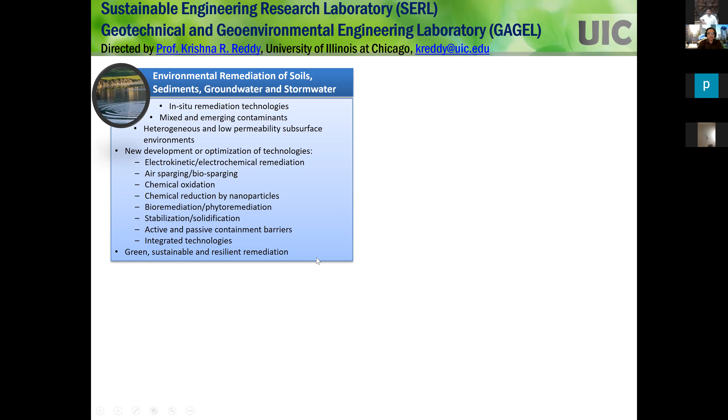I work on different types of technologies, integrating and optimizing them, starting with physical, chemical, and biological technologies. The reason I work on different technologies is you have to match the subsurface conditions with the technology - there is no one technology that can take care of all expected situations in the real world. Recently I've been working on green, sustainable, and resilient remediation. That's one of my major research areas.

The second research area is related to this short course: I work on waste management and landfill engineering. Waste management deals with beneficial use of waste materials, even biological processes. When you talk about landfills, as geotechs we contribute quite a bit, looking at mechanical stability, contaminant transport, liner systems, and cover systems. These days we use a lot of biological concepts to make things sustainable, so we work on biocovers and bioreactor landfills.

In this course, I'm giving brief lectures on broader topics. But if you are interested in knowing more about a lot of my research, you can look into the papers that I have written.

The other area of research I work on is called life cycle assessment and sustainable resilient engineering. Here we try to quantify sustainability and then assess different sustainable materials and designs. This is a very broad area applicable not only to geotechnical and geoenvironmental engineering, but any specialty in civil engineering, even chemical and mechanical engineering. It's becoming very important these days to look at sustainability and resiliency - not just talking about it, but actually doing something and evaluating how well you are doing towards this sustainability and resiliency.

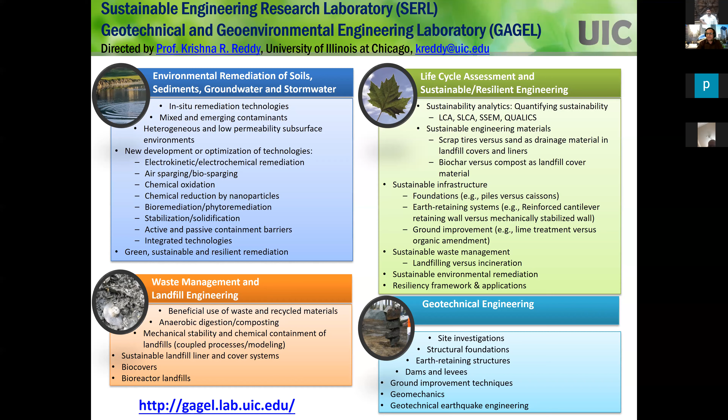If you want specific research projects and publications, go to this website and you can find all the information you need. That's what I do for my research. It's pretty broad, but it's more on geoenvironmental engineering, sustainability, and resiliency.

When I do research, I follow this research philosophy. First, I identify the real world problem - what is that problem that needs to be resolved? Then we come up with a hypothesis of the solution that could be potentially feasible.

We test that hypothesis through bench scale testing - basically small scale experiments in our lab. If results are promising, then we scale up and do large scale testing right in the lab.

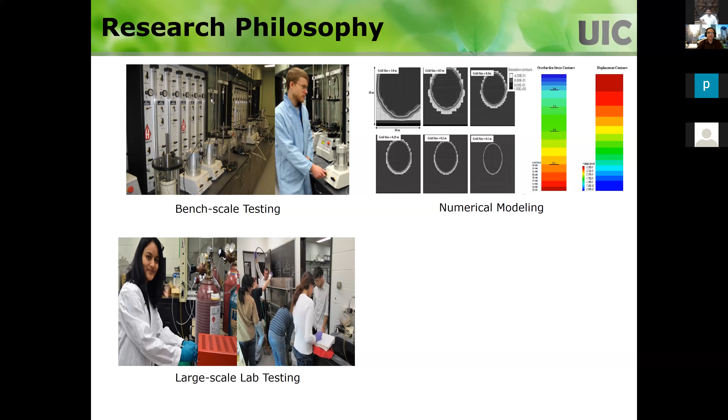If it works out good in large scale testing, we do mathematical modeling. You understand all the different fundamental processes from the bench scale and large scale lab testing, and we incorporate those processes into mathematical modeling to model real world situations - if you have to do that project on a large scale, how do you do that?

So we model that mathematically, then we actually design a typical field system, go to the field, and try to implement that and see if it works as we modeled. It's always important to start with fundamentals, then go systematically and evaluate that solution in a field scale scenario.

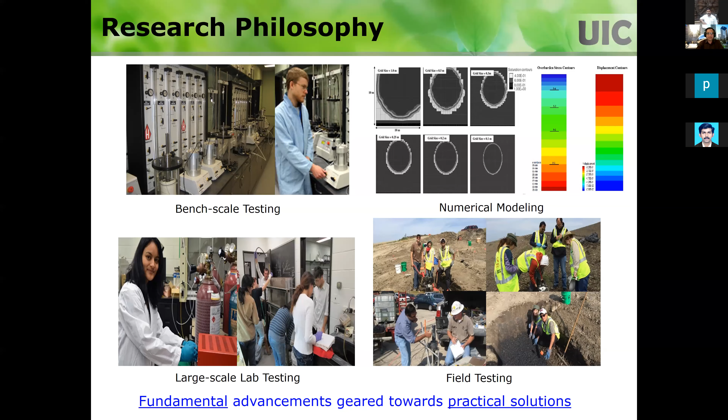Our research goal is, for every project we work on, to advance the fundamentals, but at the end, come up with a practical solution. We don't just want to look at fundamentals and write papers - of course we publish papers, but we want practicing engineers to take our solutions and implement them to solve real problems. That makes us very happy, because we're able to contribute to solving society's problems and making a difference. That's the research approach we follow on the projects we work on.

I do a lot of lab scale testing. This is our lab, showing the facilities we have. We have all kinds of soil and material testing, geochemical characterization testing, and depending on the project, we develop bench scale testing. These are all in our lab, and the students actually use all these things.

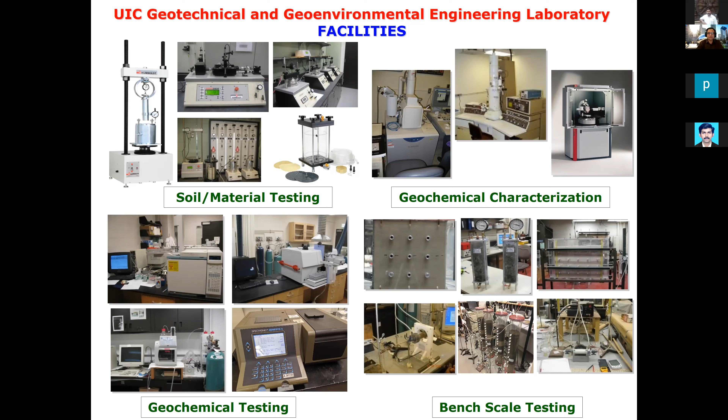Over 25 years of my career, I have had the pleasure of working with students from all over the world. In the US, we have people coming from different countries, so when I go to the lab, I have international students. It's very nice to interact with these people and learn not only through research, but also learn the culture and have a good time.

Not only working with these people, but every few years we get a different group of students. So you keep working with the students, different students every few years.

Coming back to the presentation, my presentation is on end use of landfills. This is how I'm going to organize it. First, I'm going to talk about waste dumps - how do we deal with them, what are the problems, and then how do we solve that problem. So remediation - how do we remediate? And then once we remediate, how do we use those sites for beneficial reuse? So end use - how can we use these sites at the end?

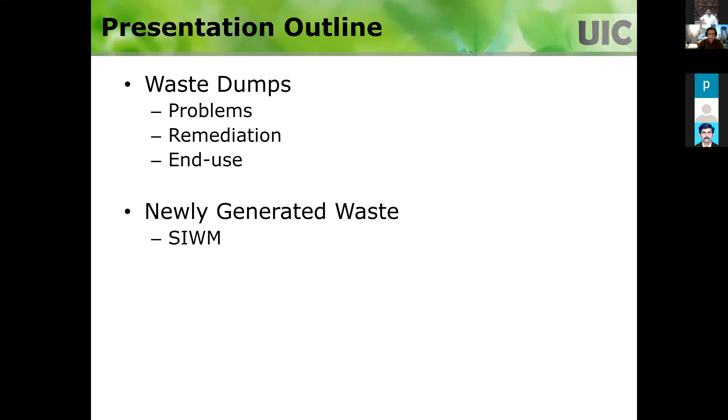I'm going to talk about that one in the beginning, and then I'm going to talk about the newly generated waste. These waste dumps are for the waste that was generated in the past, and that's how it was handled in the past. But now, when you have newly generated waste, that needs to be handled properly, not dumped in the waste dumps. So I'm going to introduce the concept of sustainable integrated waste management.

And then I'm going to talk about engineered landfills very briefly, how these days landfills are engineered. And once you have an engineered landfill, and once it gets closed, what can you use those sites for? That's what I'm going to cover. At the end, I'm going to have closing comments, and after that I would love to answer any questions that you have.

I just want to put this caveat - since I'm in the US, I'm going to give a US perspective on all these things. Unfortunately, I don't know much - I know some background on what's going on in India, but I cannot be an authority to say what is correct. So I'm going to basically give you a US perspective, which is good because you need to know what is done in US, and then you can see what are the lessons to be learned, and how you can do things in India, right? So that's my agenda for my presentation.

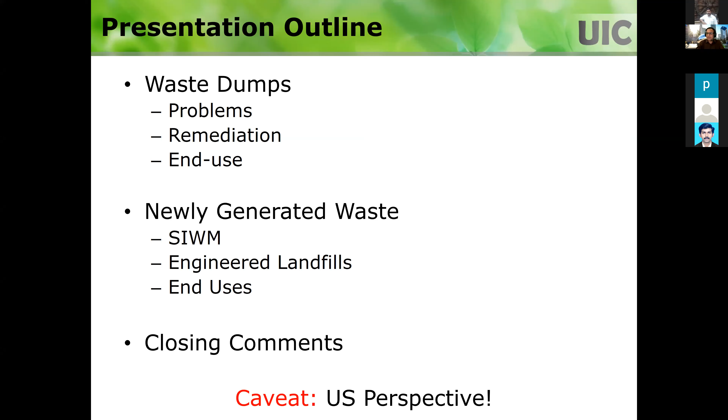So let's talk about open waste dumps. If you haven't seen a waste dump - if you are in a small city, you might have seen outskirts where people are dumping it, or the city designated a certain area for dumping, but you probably don't see huge piles like you see in big cities. If you are working in this area, one advice I have is for you to go to one of these sites and visit them. You can call up people, get some contacts, and say hey, we want to come and see it, we are students, can you show us? It's eye-opening. You can read books, you can listen to presentations, but you cannot get the feeling that you get when you visit these sites.

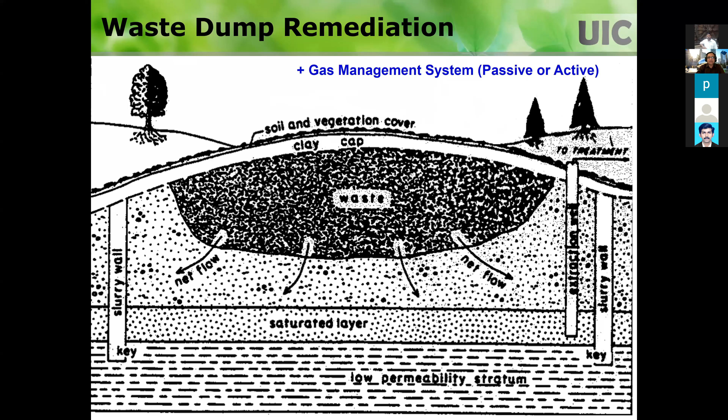So, gas management system - I gave you a lecture on this one the other day. You can have extraction wells or trenches, or if the gas flux is not that much, you can actually have a clay cap amended with some organic material, like biochar. We call this biochar-amended soil cover, and it mitigates the gases passively within the cover system, eliminating the issue.

So that's how these are cleaned up. Once you clean up and put vegetation on top, it can convert into a park. Most of the time, the end use as a park is the cheapest option. Of course you need to grade the elevation and everything. This is one of the landfills close to my area, and people go there since it's high up.

And then from there you can get a good view. But there are other end uses possible, which I'm going to talk about later. Even those end uses are possible on closed dumps as well as engineered landfills after closure - I'll explain those later. But the simplest end use is as a park, with a soil cover so there's no exposure issue to people. They can go there and enjoy it, and since you have a mountain, the top view would be a prime spot to look at the surroundings.

On the other extreme is mining - basically digging it out, screening, and separating these things. But mining is done only when the organics are mostly degraded. If you have organics in there, generally it's not done. The other thing is the residue after organics degrade - it should be clean, not contaminated. If it has a lot of heavy metals or other semi-volatile organic compounds, then mining becomes very expensive because you need to address the contamination.

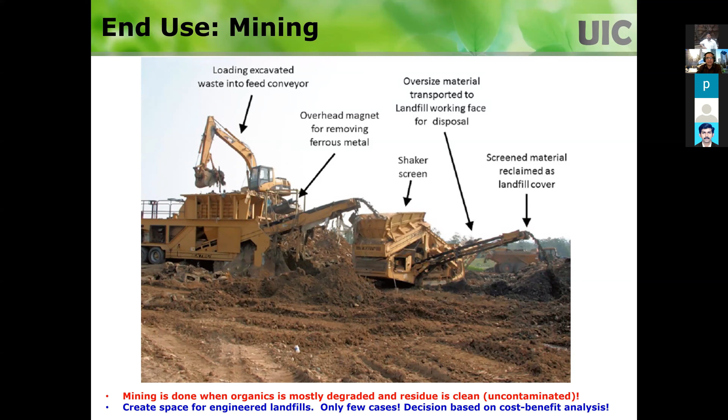So just wanted to mention that - in the US, that's the status. In other countries like Europe it could be different, but in the US most mining is done in areas where they wanted to create space for an engineered landfill - digging out all the degraded waste from the old landfill and using the same space to build an engineered landfill. That's the waste dump story, from a US point of view. You learn the lessons from that, and then see what can be done in India.

Now the question is about newly generated waste - we are creating waste every year, and the amount generated is increasing because the population is increasing and so forth. So if you have existing dumps and you're not solving those problems, and you keep piling newly generated waste on top, when are you going to solve the problem? The waste dumps problem is going to keep increasing - tremendous amounts of waste are being generated, and this waste is still going to the dumps. So if you're trying to clean up the dumps but keep adding more, the problem isn't going to go away. Think about it - it's not rocket science, just think about it in very practical terms.

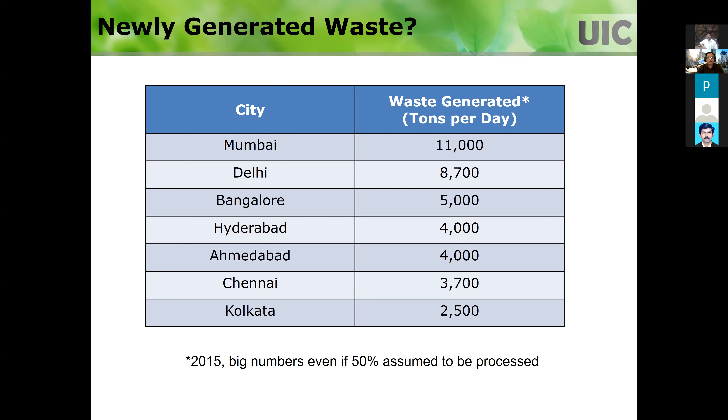Okay, if I'm generating so much waste per tons per day, so it's like Delhi, 8,700, Mumbai let's say 10,000 per day, right? Even if you assume 50% processed out of this, so 5,000 tons per day. You can add up every day that much. So per month, how much? Per year, how much? So you still need to accommodate that waste somewhere. So if you don't have an engineered landfill, obviously you are taking it to the dumps, and the dump situation is going to become worse and worse.

So young guys like you guys need to think rationally. Also all the stakeholders that work on these waste management issues, they should really come together and think about what is the long-term solution to this waste problem. So we have waste dumps, and we are creating new waste every day, right? So we need a comprehensive solution to this problem. This is a very challenging and very important issue for researchers. If you're a student, master's or PhD student, if you can do something in this area, you are really helping people, helping the planet. So if you are passionate about environmental issues, this is the one that can really make you happy. So question is, what can be done, right?

So what is the big picture? What can we be doing with the newly generated waste? What is the rational way of doing it? So I want to show you this picture. This is called integrated waste management. Remember, you've probably seen the waste management hierarchy, but the waste management hierarchy does not work in the real world. So this is called integrated waste management strategy, where you're going to collect and sort it, and then do the material recycling, and then some biological fraction you want to treat by composting or anaerobic digestion, and then whatever is possible, you want to treat thermally with energy recovery or without energy recovery, and also things that you cannot do anything with any of these other options, you can landfill it. Not landfill here meaning you're talking about engineered landfill, not the waste dump. And you can actually make that landfill an energy resource, so landfill gas use, you can do it.

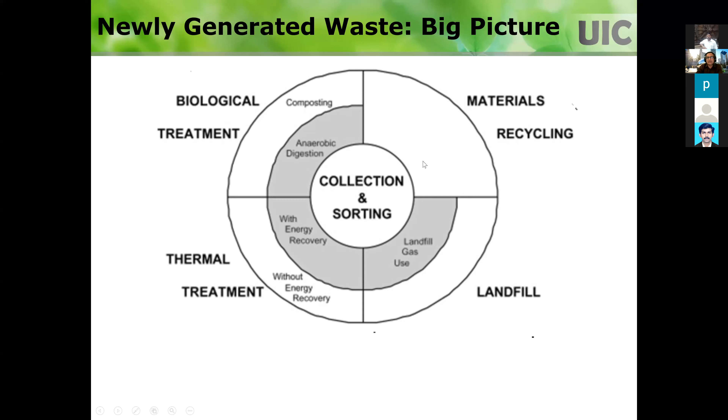So what I'm trying to say is, a lot of times people argue that okay, we're going to use thermal treatment and make the waste disappear. That's not going to happen, because there's a certain amount of waste that is not amenable to thermal treatment. Or you want to do biological treatment, not all waste components are amenable to these biological treatments, right? Not everything could be recycled. So the idea of integrated waste management is that we need to use these combined options at the same time. Don't think like, okay, I want to emphasize this more and emphasize this less, but look at your situation and come up with a combination of these options. So you want to have material recycling, biological treatment, thermal treatment if possible, and also landfill. You need to really think about this framework of using all the options that you have to benefit the situation that you have at hand, right? So this is called integrated waste management.

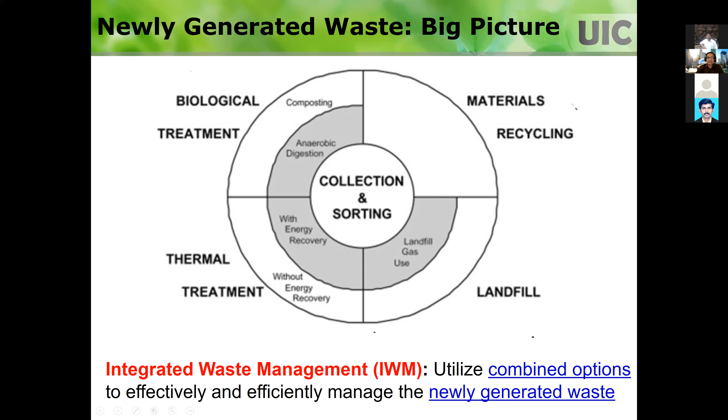Now the question is, okay, I'm in a city, obviously I cannot do 100% recycling. How much should I do biological treatment, how much thermal treatment, how much should I landfill? That really depends upon sustainability factors. So you really look at that integrated waste management from a sustainability lens. This is what I mean by that. So this is the integrated waste management strategy that you have in the middle, right? That's what I showed you before. Then how much of each option you have to use in a given situation really depends upon economics - what is economically feasible? And then environmentally, what is the best way to do it? Obviously you're trying to create a better environment, but if I have thermal treatment and other secondary environmental negatives, then that's not good. So you need to look at the broader environmental impacts, broader economic impacts, and then you also need to look at the societal issues, right? Community issues. So obviously, you need to give them food first before you think about spending a lot of money on this integrated waste management.

You need to really think about the people in that community, what their social requirements and survival requirements are. You take care of the social needs first, and then in that context decide what can be done. This is the best framework you can apply.

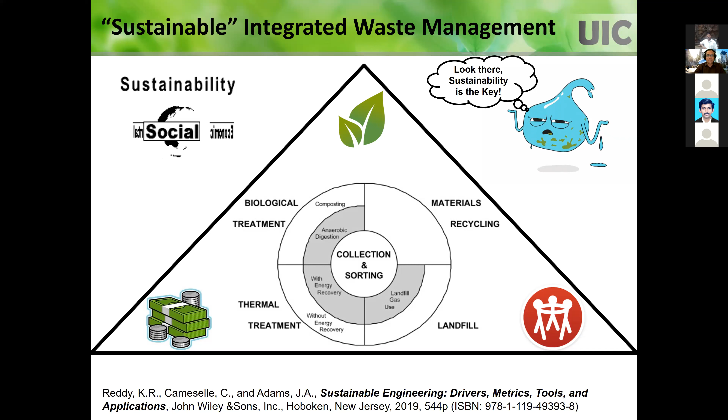This is the framework people are not grasping. People want to do just one thing. The reason it's not grasping is you need a multidisciplinary background to address this waste management issue in a holistic way. I could spend a lot of time on this, but this course is focused on landfills.

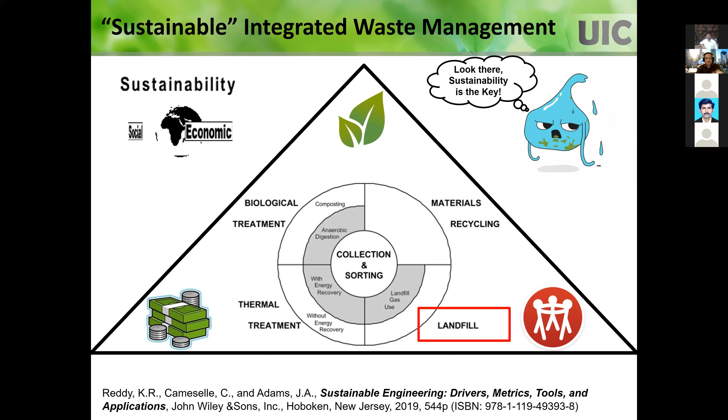Waste containment systems, landfills - this is not rocket science anymore. In the US we have regulations, and people follow the same kind of design everywhere in the world. You have a bottom liner, a side liner, a leachate collection system on top, then you pile up the waste, and then you have a final cover.

We have well-established materials and design methods for liner systems, leachate collection systems, and final cover systems. People are doing it - in the US we've been doing it for over 30 years. We design landfills per these established procedures, they've been monitored, and they are working well. It's a proven concept with proven design analysis methods.

So not only the bottom liner, leachate collection system, and final cover system - all these landfills will have leachate collection and treatment. That's important because the main problem with landfills is the leachate that needs to be addressed, and also landfill gas that comes up. So what do you do with that? You collect it and treat it, or do something with it.

As I mentioned in my last lecture, there are many options for that - you can create energy out of it, which is good. So landfill is not a waste thing; you're creating an energy source that you can really capture.

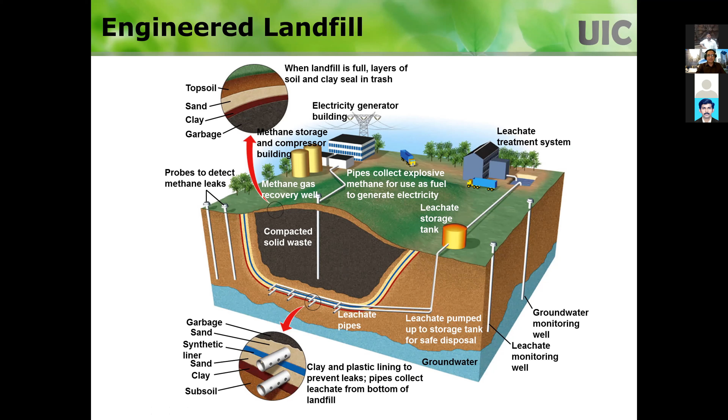We do these things routinely in the US.

So as I mentioned, there are a lot of resources that you can use to design these landfill components. We wrote this book, and my co-author has over 40 years of practical experience. I also worked for 3 years in industry. So whatever is in this book, it's not hypothetical, it's all what is actually being done in practice.

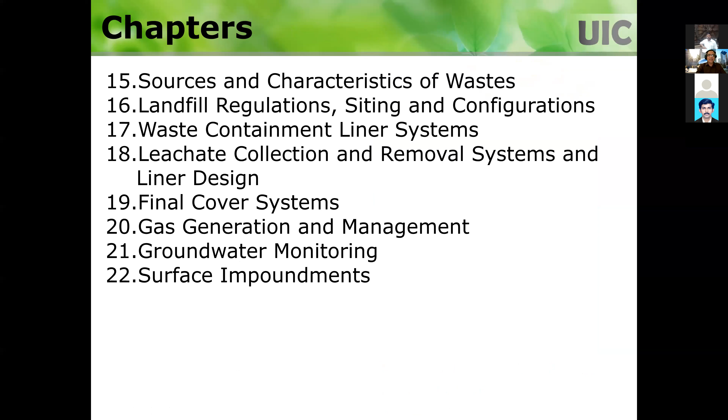I know this book is expensive, we talked about this before. Make sure your library or somebody who can afford it can get it, and look at these chapters carefully. I like the way these chapters are written, because it's a logical sequence of topics.

When I took landfill class as a graduate student, my professor came in and started talking about liners on the first day. I had no clue what we were talking about, because first you need to know the sources and characteristics of the waste. Are you dealing with MSW landfill or hazardous waste landfill? What are the regulations? How do you locate the site? What are the liner systems? You need to build gradually. Even within liner systems, you need to think about where to start - what is the logical way to work on these things?

So that's the idea of writing this book - to give a new reader, new engineer, or student these sequential topics, and at the end you end up with an engineered landfill that works. As I said, all the landfills in the US are engineered - we don't have any dumps. Dumps are not allowed.

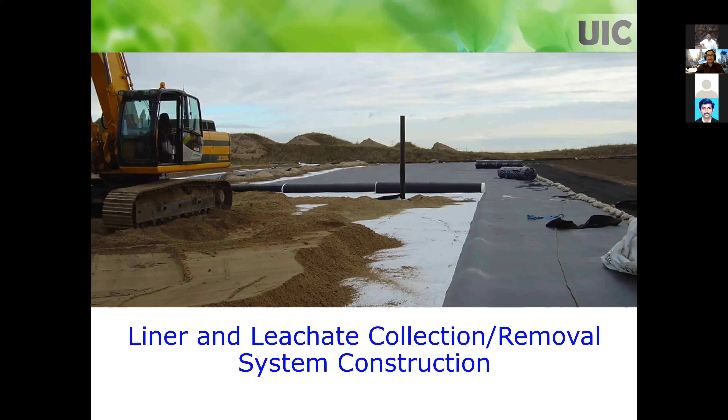I've been to many landfills. As I mentioned, you really need to go to a landfill. When I teach a landfill design class at my university, I make sure we take students to the landfill, and have the landfill operator give a tour of the whole landfill, so they can put what they learned in class into context when they see everything.

You place everyday waste and compact it with these compactors, and every day you cannot walk away without putting a daily cover. The next day, if it's a removable daily cover, you can remove it and put more waste, compact it, and that keeps going. At the end, you put the final cover construction, and then what is the end use?

Remember, the landfill requirement says that after you close it, put the cover and vegetation, you need to monitor for 30 years. What are you monitoring? The leachate, gas, and groundwater - that has to be done for 30 years. During landfill operations, money is taken out from the landfill owner and put in the bank.

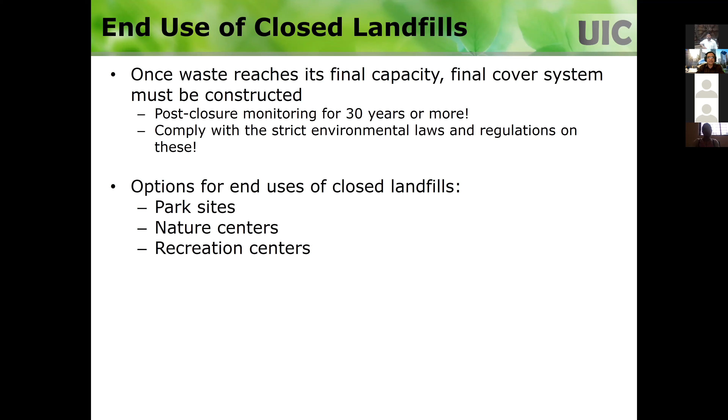Coming to the end use of closed landfills: once you reach the final capacity and put the final cover, you monitor for 30 years, as required by environmental laws and regulations. Then that site can be used for different purposes - park sites, nature centers, recreational centers, golf courses, commercial buildings. You can use it for a lot of these different end uses.

Unfortunately, people don't think about this end use at the beginning of the landfill project. They think about it only after the landfill has been in operation for many years, or when it is closed. By that time you have less flexibility - you've already decided what the geometry and final cover are going to be. If you knew in the beginning, you could have changed certain things and made it much easier.

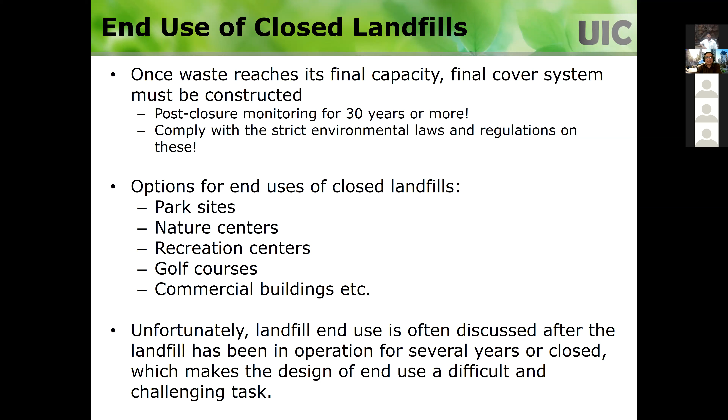So the end use is important. You don't want to walk away from the site and leave that large area of land useless. You want to use that area for some beneficial purpose, and the end use consideration improves the aesthetics of that location.

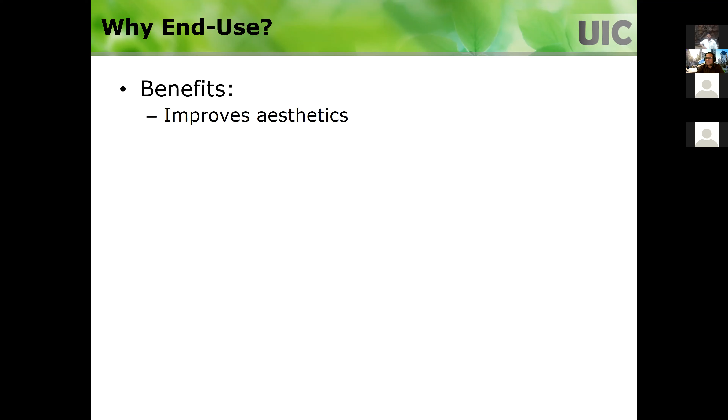Here in the US, you go to a closed landfill and you don't even think it is a landfill - there's no smell. Somebody has to tell you, or you'll see monitoring wells around, then you'll realize it may be a landfill. Otherwise, they are very nice locations - nice sites that look pretty good.

Especially if a site is in an urban location where land is scarce, using it even as a park in the middle of all that built-up area is really nice. That's what I'm saying.

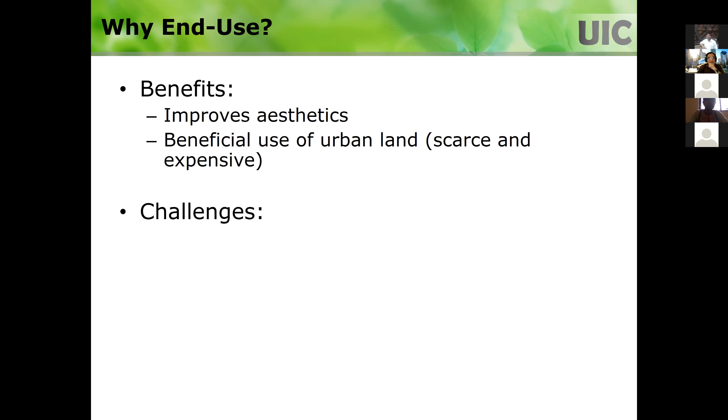Those are the benefits, but there are a lot of challenges. You're trying to build on top of the waste - think about it, building on top of soft clay is a problem. The problem with building on top of a landfill is you're going to have substantial settlement, also non-uniform settlement, which is a big problem.

The waste is degrading slowly, so you're going to have a landfill gas emission problem that we have to worry about, and leachate outflow needs to be addressed. These are big problems you don't see in typical infrastructure development projects.

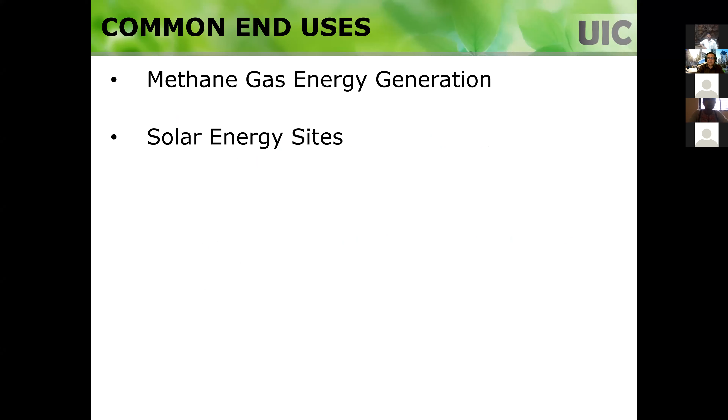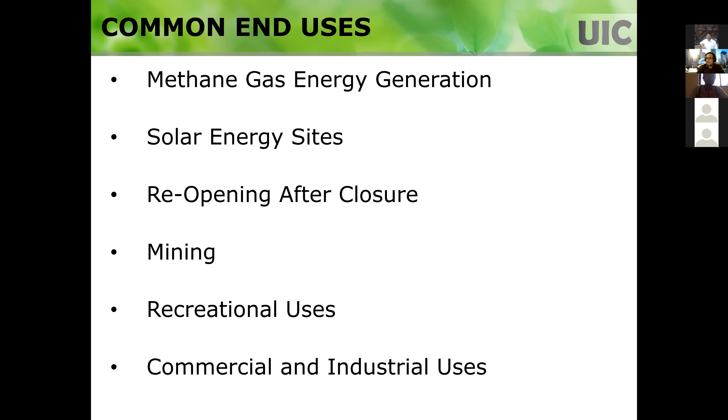But still, landfill sites after closing are used for different purposes. The common ones are: methane gas energy generation, solar energy sites, reopening after closure for mining, recreational uses, and commercial and industrial uses. These are all the different uses actually practiced in the US. So I'm going to quickly give an overview of each of these.

Methane gas energy generation: as I mentioned, as waste degrades in the landfill, you get about 50% methane in the landfill gas, which has a lot of value. The heating value is 500 BTU, compared to natural gas - so it's not bad. Landfill operators can sell that gas or use it for energy recovery.

What you do is collect the gas from the landfill - you have to put those gas collection wells anyway. Then you pump the methane through the gas scrubber, then the gas compressor, and finally the engine generator to generate energy.

This is also promoted by US EPA, because landfills emit a lot of methane, which is a huge greenhouse gas contributor - methane is 28 times more potent in terms of global warming compared to CO2. So anything you can do here is good. US EPA has a program to reduce methane emissions and encourages these kinds of projects, because now you're not emitting to the atmosphere, you're using the energy, and equivalent fossil fuel burning is avoided - so you have double benefits.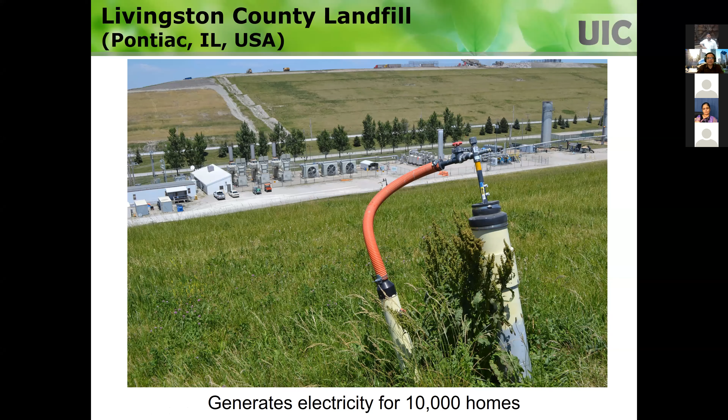Then this landfill site can be used as a solar energy site. It's a huge open area, right? If you put solar panels on those areas, you're creating a lot of solar energy.

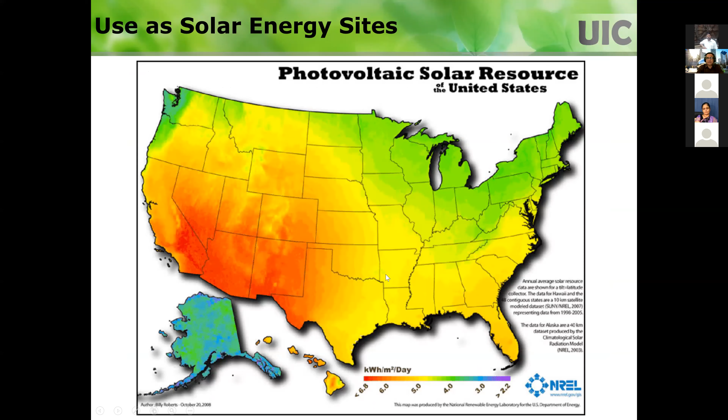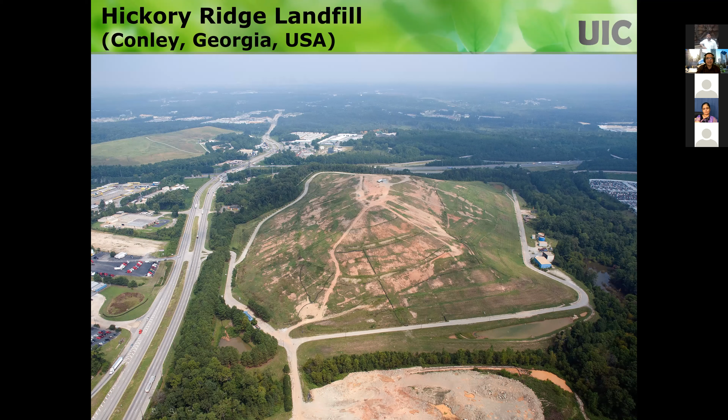This is the landfill at a place called Conley, Georgia. This landfill is closed, right? They put a final cover on top once they reach capacity, and then it's closed. So what is the beneficial end use? They put solar panels on top of it.

They used a unique cover system called exposed geomembrane solar cover, with about 7,000 solar panels placed on it. Think about it, this is open with no obstructions, so you get the maximum efficiency out of these things, which is excellent. You can do those kinds of things anywhere you want.

The other end use is reopening after closure. This is not really an end use, but it happens sometimes. You close the landfill, you have the existing landfill, and let's say you create new waste and don't have a landfill to dispose of it in. What do you do? Let's say you close the landfill, and then you have this new waste, and you cannot find a new landfill location. What should you do?

If you don't have any other option, maybe a good option is to expand the existing landfill. This is called vertical expansion, you're putting it on top of the existing landfill, see here. You use this when you don't have much area, you only own this land, this is the property boundary, and the only way you can expand is going up, not laterally. That's what is being done.

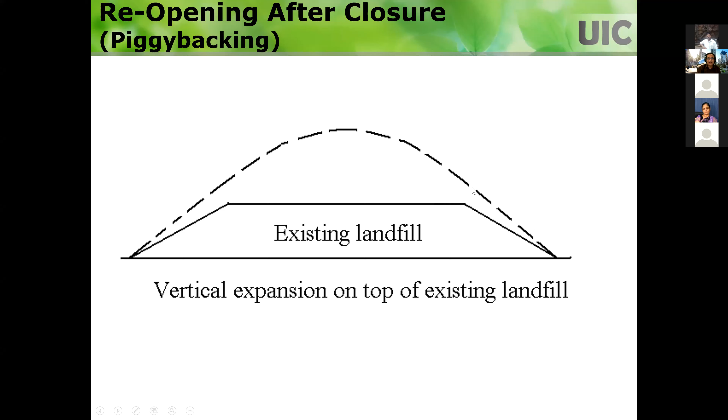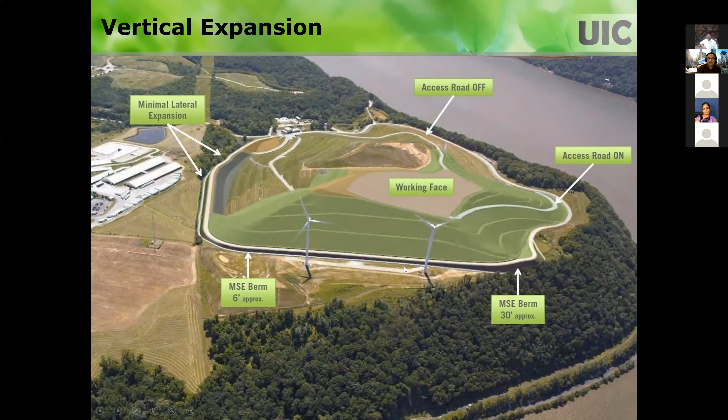This makes it challenging because at the edges, the original landfill had stable slopes, but now if you want to increase it, you need retaining systems around it. Otherwise it won't be stable on that steep slope. So now there are a lot of reinforced retaining wall systems, because if you don't have a retaining wall system, you just have a perimeter berm, and you'll occupy so much space. This is the boundary, you cannot go across it. When you put a conventional earthen berm, you occupy so much space that you lose the space for the waste.

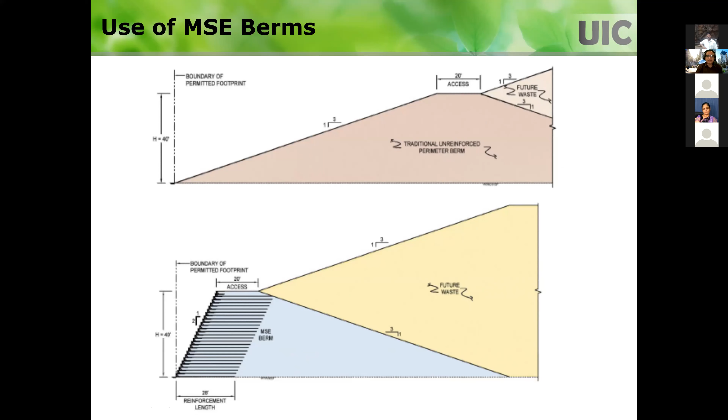Whereas if you put a reinforced retaining wall, the space occupied by the retaining wall has reinforcement and backfill, and then behind that you can have a large area, so you can compare that you have more space for more waste to be disposed. So in a lot of these cases, reinforced retaining walls are becoming common. In the back of that, you need to put the membrane and then expand on top of the landfill. So these projects are being done. This is where the area is limited and you can only go up.

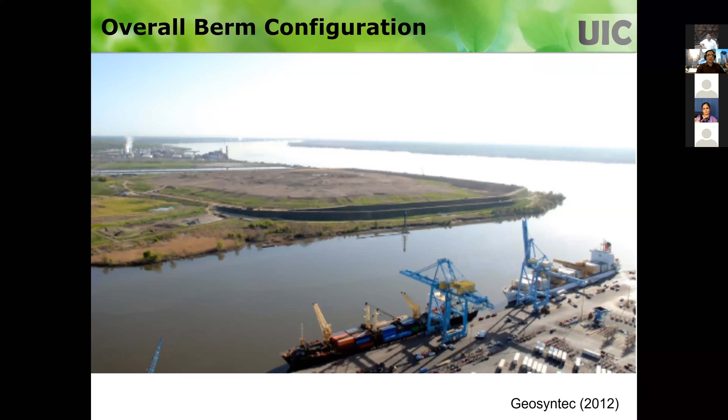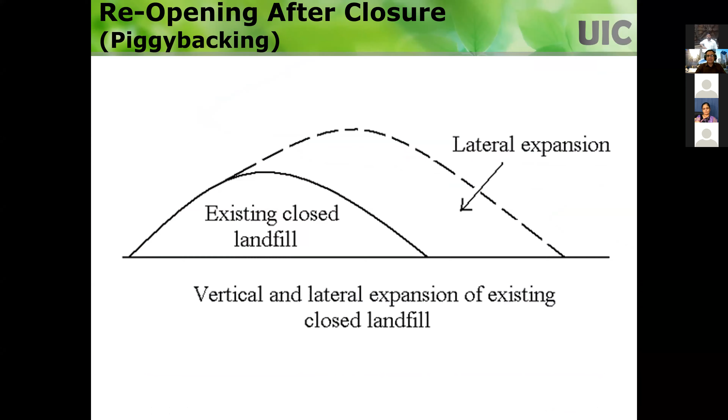But in some cases you may have area available right next to an existing landfill. This is called lateral expansion, so you can expand laterally. For example, this is the landfill location, and there's nothing around that area, so we could basically have a new cell right next to the existing one. This is the existing landfill, and you can have a lateral expansion right next to it. So it was closed, but now you realize you need to accommodate more waste, so this is the lateral expansion you can do. Put the liner systems and everything, and then make it a bigger landfill.

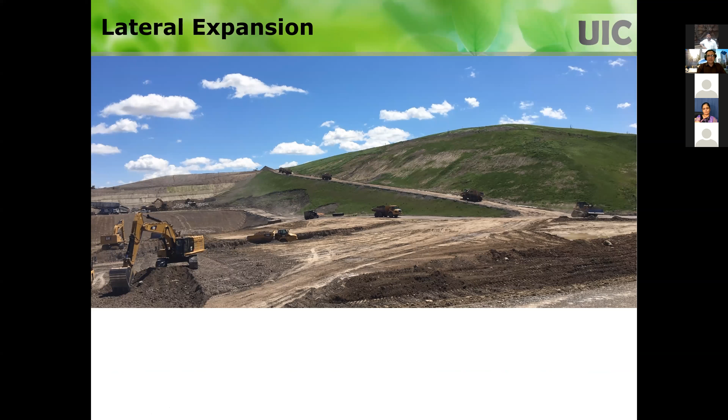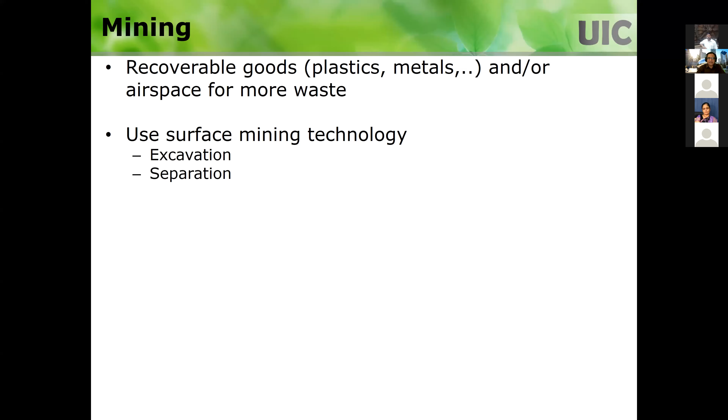The other one is mining. Mining is basically to recover the goods, and also, as I mentioned before, mainly in the US it's done to create more airspace for putting more waste. So if you're running out of space and cannot do vertical or lateral expansion, what is the best way to do it? Then take out the waste and mine it to create more space that you can put more waste into in the same landfill. You use surface mining technologies, excavation and separation. There are different steps: you split them, metal separation, then screens, then wind sifting, and basically you separate these metals and oversized particles, heavy materials, light materials, and the fines.

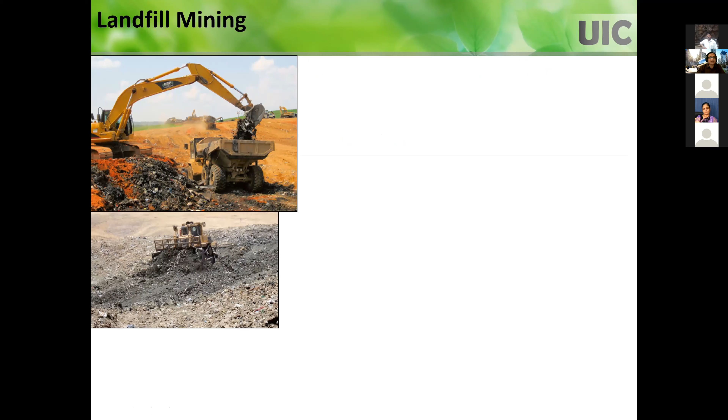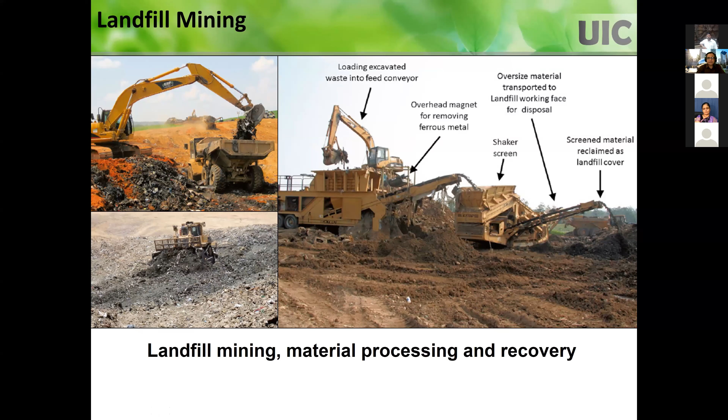So you basically excavate the waste and then transport it. Here is the excavation feeding into the conveyor, and you have magnets that take out the iron. Here are the shakers, and you shake it, and separate the oversized versus finer fraction from that waste. So that's what is done.

And just an example, this is a landfill in the US where they tried to do it, phase one, just to see how this whole thing works out. Phase two was supposed to start in 2019, 2020. I don't know the status of that.

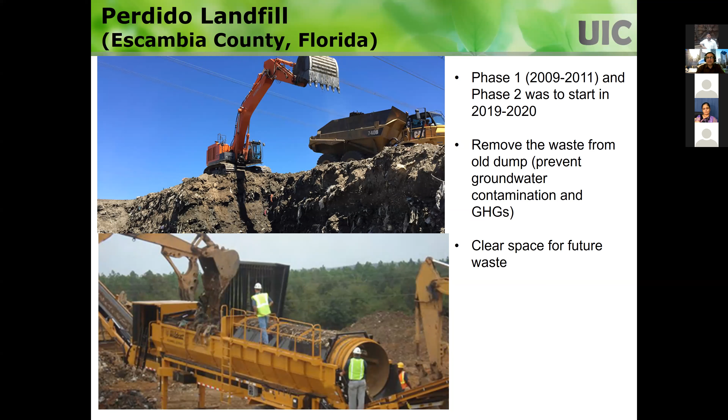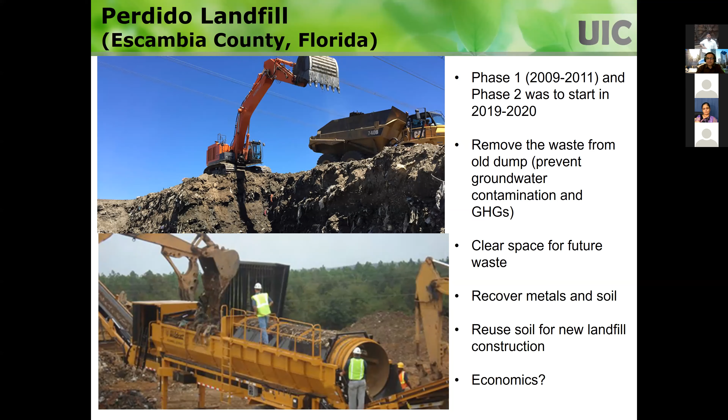So the idea of this mining at this site is there was an old dump without any liner. This is a huge landfill, and there's a portion that was not lined, and they wanted to prevent groundwater contamination and greenhouse gas emissions from there. So they wanted to also create more space. They wanted to basically mine that old landfill dump site area, recover the materials and create the space, and then use the soil for the new landfill construction at the same location. Economics-wise it's expensive, but they didn't have the option because how do you clean up the contamination at the site? So it's a constant source emitting greenhouse gases, so to control the environmental pollution they had to do this mining.

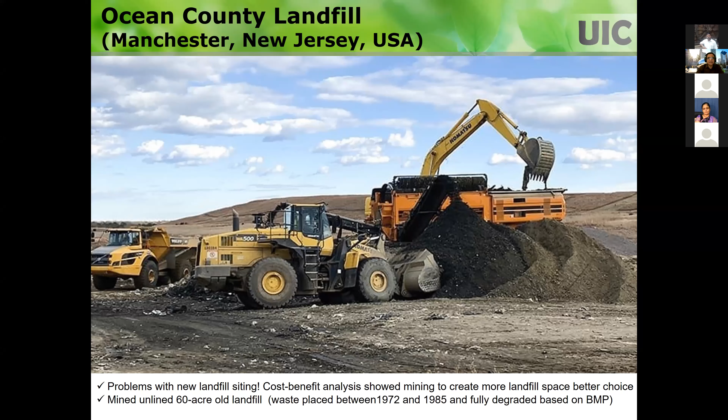This is another landfill that is mined. The problem here is that they had this landfill, and it reached its capacity. They were thinking about having a new landfill somewhere else, but it didn't work out. They did all the cost-benefit analysis of maybe having a different landfill at other locations, and what options they had. Finally, they found out that mining is the best option. So you mine it to create more landfill space to accommodate more waste. Here it's an unlined, unengineered landfill. The waste is in there, and basically the waste is degraded, and then you're using it at the same location.

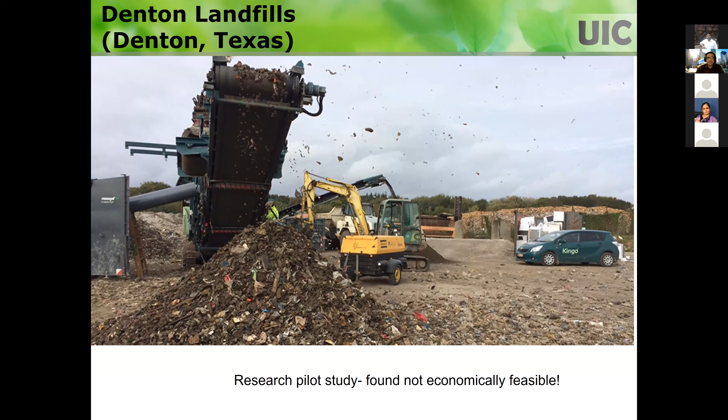Recreational uses are very common - golf courses, nature and recreational parks, animal refuge, tennis courts, sliding hills, ski runs. This is one landfill in Florida - you can see this is the entire landfill. It has hiking trails, baseball stadiums, basketball courts. This is the place people want to go more often, so some people may not realize this is a landfill.

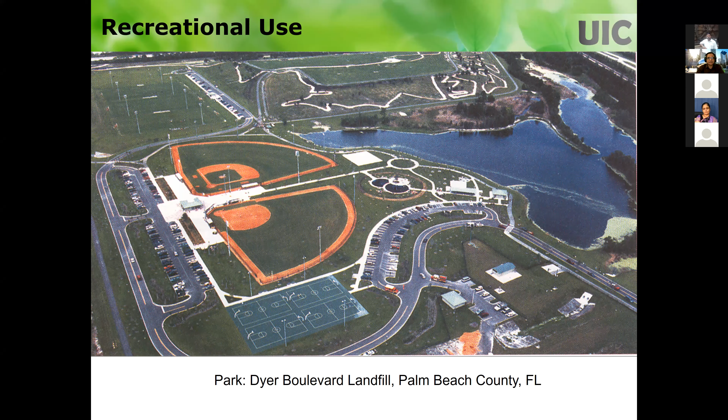When thinking about these recreational uses, capping is an important thing - erosion, infiltration, and you need to also think about landscaping aspects, trees, and what kind of vegetation can grow on the landfill cover. You have to think about settlement, which keeps on happening. You'll do maintenance, but you don't want to put anything permanent - you want non-permanent flexible materials, and then ongoing maintenance.

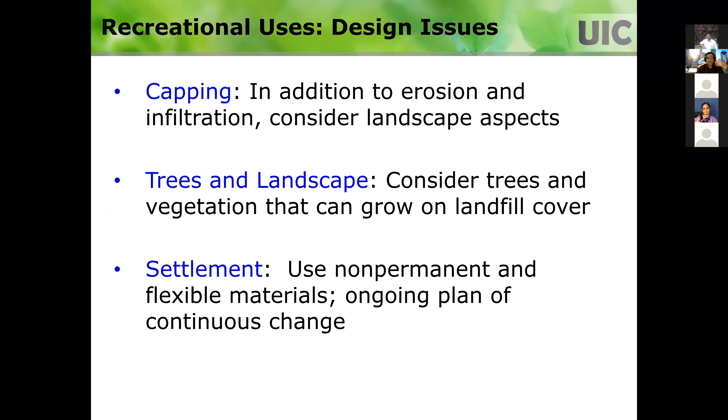The last use is commercial and industrial uses on top of landfills. In those days, landfill locations used to be outside the cities; now they are within the city, within the center of the cities. So those are ideal locations to have retail stores, warehouses, office buildings, manufacturing facilities - they want to use these locations for buildings, constructing roads and parking lots.

This is one landfill where they built this building - it's a Home Depot, which sells all the materials needed for constructing homes. It's an unlined landfill, so there was no liner at the bottom. They used pile foundations to support this structure - the piles go all the way to the bottom of the waste and then into the subsurface soil. They also have an active gas control system in this one.

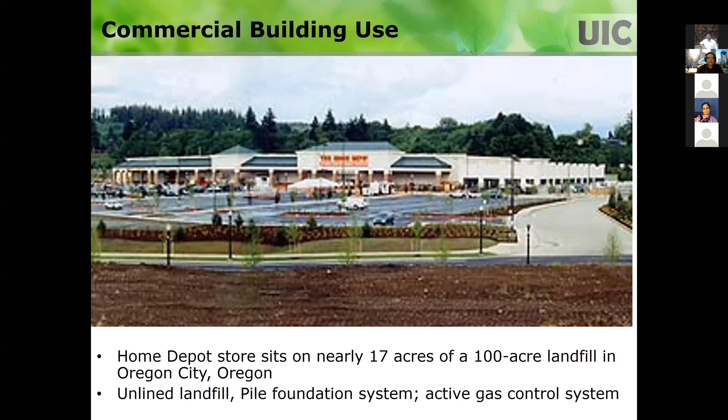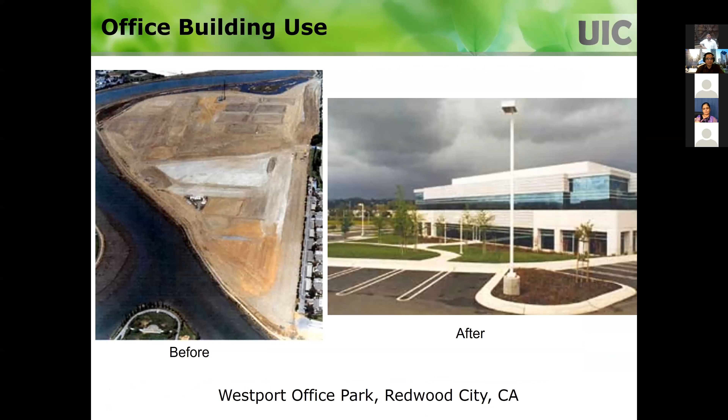This is another location - there's a landfill converted into an office building. But you need to think about the challenges in designing these things. Designing a building on problematic soils is complicated, but trying to design on top of a landfill is even more complicated. Nothing is impossible for engineers though - engineers are there to create solutions.

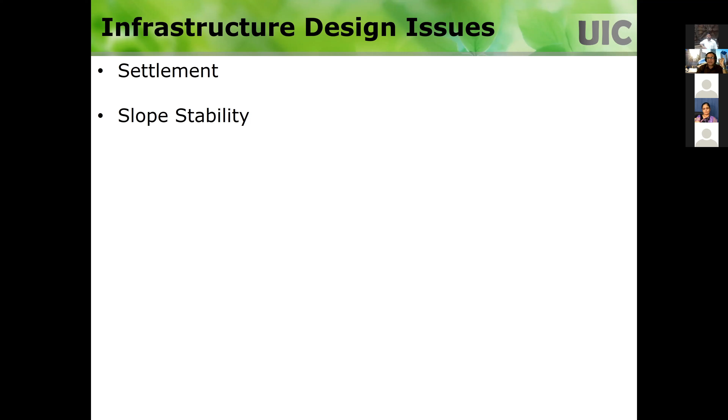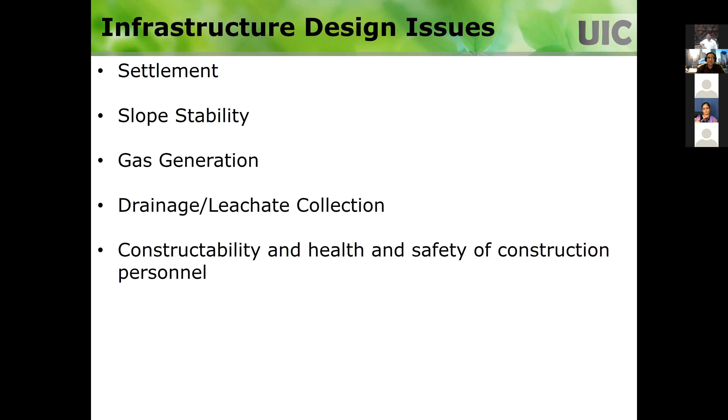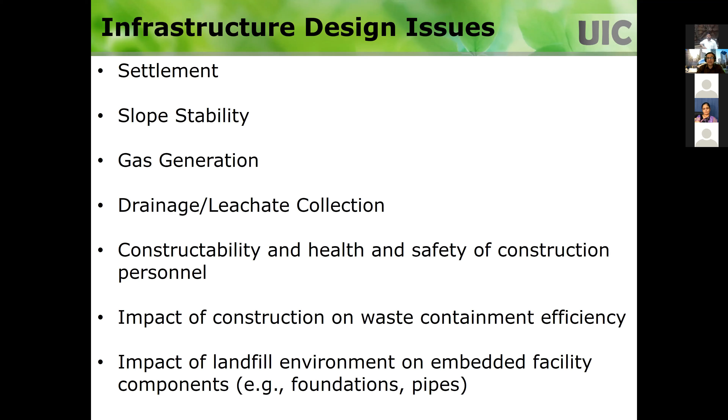We need to consider settlement, slope stability, gas generation, leachate collection, drainage. Settlement and slope stability you always consider, but we need this additional gas generation and leachate collection consideration that never happens in typical cases. Also constructability and health and safety for construction personnel - you're working in the landfill during construction, so you have to be careful. You also need to think about how construction will affect the containment facility, since you don't want to compromise containment efficiency, and how the landfill environment will affect infrastructure components. For example, if you have pipes and pile foundations in the waste, how would they be affected compared to putting them in soil?

Settlement is a big issue. Like in conventional geotechnical engineering, we use surcharging, dynamic compaction, grouting - those can also be done here, and dynamic compaction is commonly done. But another option is leachate recirculation or bioreactor landfill.

So what it is basically - you have a landfill, and this can be done only in a lined, engineered landfill. You need to have a liner system and leachate collection system; without that you cannot have a bioreactor landfill. It's called bioreactor landfill or leachate recirculation landfill. If you're just circulating the leachate only, that's called leachate recirculation. Bioreactor landfill is a broader term implying not only leachate, but you could inject other kinds of fluids and amendments into it.

So you take out the leachate and then inject it into the waste, through vertical wells or horizontal trenches. Basically, you increase the moisture content. The problem with engineered landfills these days in the US is that you put the cover on top and take up the leachate from the bottom, so the waste tends to be dry, and under dry conditions it does not degrade well. So the whole idea is to recirculate the leachate so that the waste moisture content can be higher, and then waste can degrade really fast.

So it has a lot of benefits just doing this one. There are primary benefits and secondary benefits. The waste degradation happens really fast, you can get a lot of gas right away, and waste to energy projects are possible. Settlements happen really fast, and ultimately you're trying to achieve waste stabilization quicker.

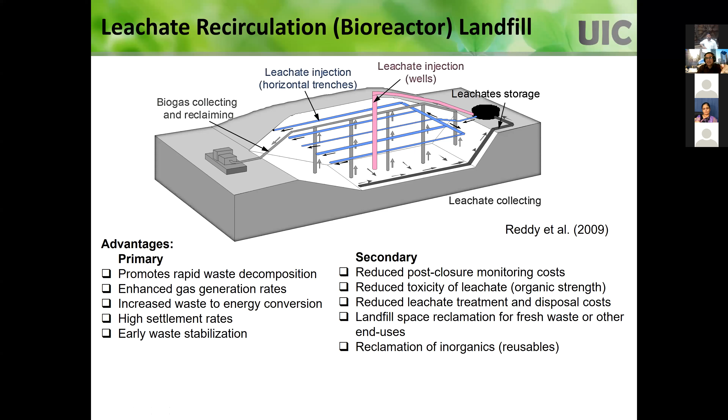And the secondary benefit is, since you are leachate recirculating it, you're not spending money on leachate treatment, and then you're stabilizing very quickly, so you're going to reduce the post-closure costs. And then once the waste degrades faster and settles, it's easy to construct anything on top of it, so end use becomes a lot easier.

So this is like an in situ bioreactor system, an anaerobic bioreactor. If you are familiar with biotreatment systems in environmental engineering, this is like a huge anaerobic bioreactor, an in-ground bioreactor.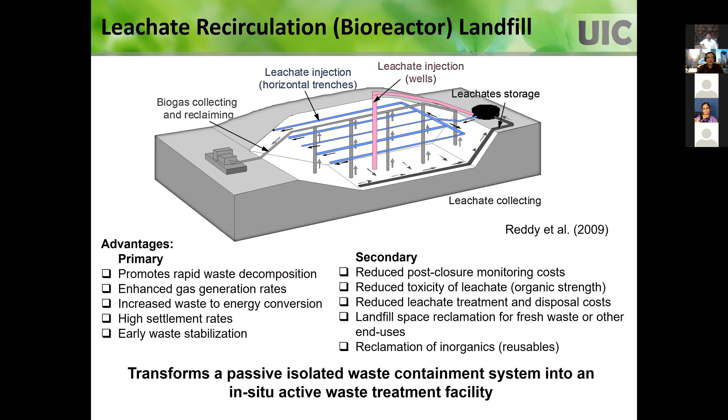So we have been working on these bioreactor landfills for a long time, maybe for the last 20 years. I was looking at my publications, I have more than 30 publications on this one. One of the publications is in IGC, the Indian Geotechnical Conference, in 2006. That was, calculate how many years ago, 15 years ago I was talking about this one.

And then we did a lot of lab testing. This example is from that paper. I didn't put all the papers, just selected a few and put those things. And then we also did a lot of field investigations, like geophysical testing and other things. I really want you to go look, all these publications are available on my website, and you're more than happy to look at them.

And then we also did modeling and created design charts, right? You want your research to be used by practitioners, so we created the design charts. And then recently we developed a very comprehensive coupled thermo, hydro, biomechanical model to predict how the bioreactor landfill will perform. That would be the state of the art modeling paper, so you can have a look at it if you're interested in working in this area.

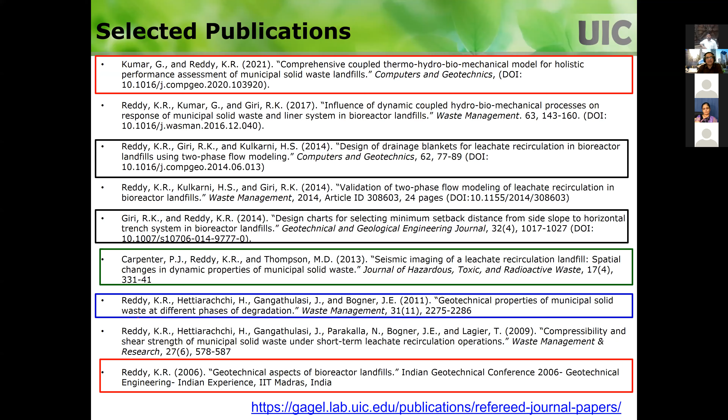So this is a very complicated situation, because you are injecting the leachate, and how the leachate gets distributed affects how biodegradation happens. When biodegradation happens, it can change the temperatures. Temperature affects biodegradation, and biodegradation changes the solids, which affects the mechanical properties, and all properties of the materials change, including the hydraulic conductivity, and the leachate distribution changes. So you have thermal, biomechanical, and hydraulic processes, all interlinked. If you are looking for a challenging research problem, this would be one of those problems.

So we did this modeling, and we were able to predict, in a given bioreactor scenario, what will happen to all these things that we are interested in learning.

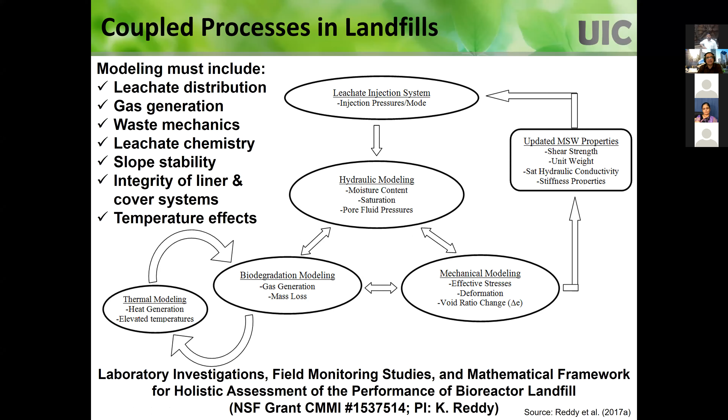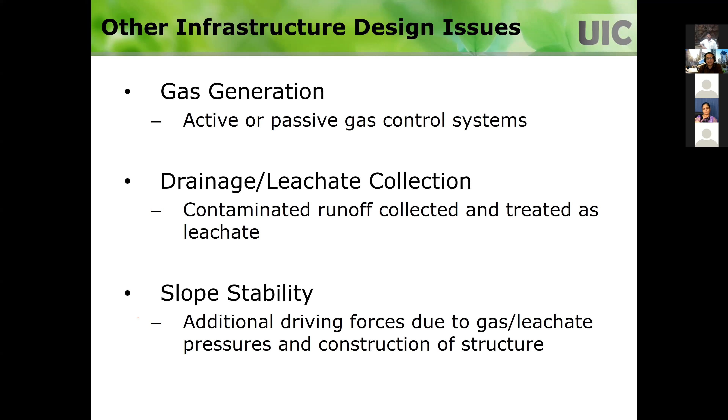But you need to look at the gas generation, so you need to have an active or passive gas control system. Let's say you want to build a building, but if you don't collect the gases, they are going to appear everywhere, and create stability problems, but also health problems. Leachate issue is also important, you need to collect the leachate, and also look at runoff issues, and slope stability issues. You need to look at not only the applied forces, but also any gas or leachate pressures that are generated.

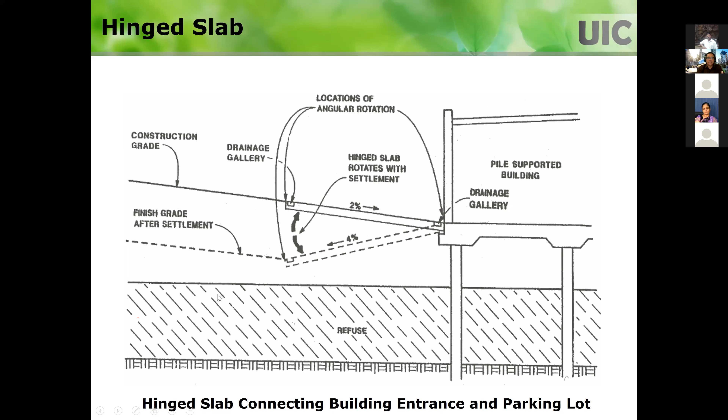That's what you want. When it rains, you don't want the drainage to go towards the building, right? You want the drainage to go away from the building. So you need to think about how the settlement is going to take place, and then we'll design that.

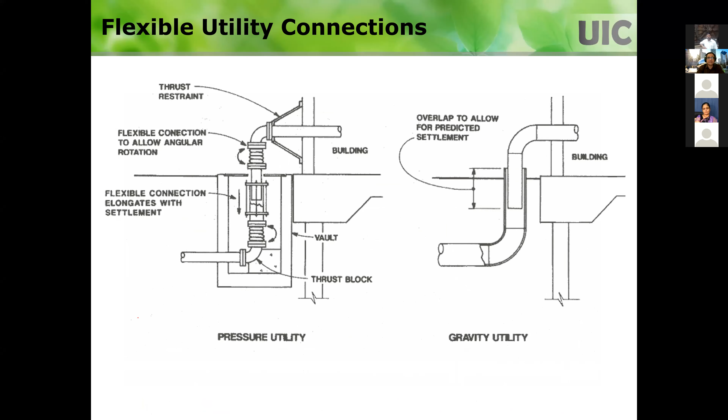Pipes need to have adjustable, flexible connections so that they can elongate or compress. That's important. And the foundations, when you put it in a landfill cover, you need to design based on the fact that you have solid waste below that. It's done with a grid foundation or a mat foundation that has been designed. Sometimes you may have to adjust the landfill cover thickness to accommodate this.

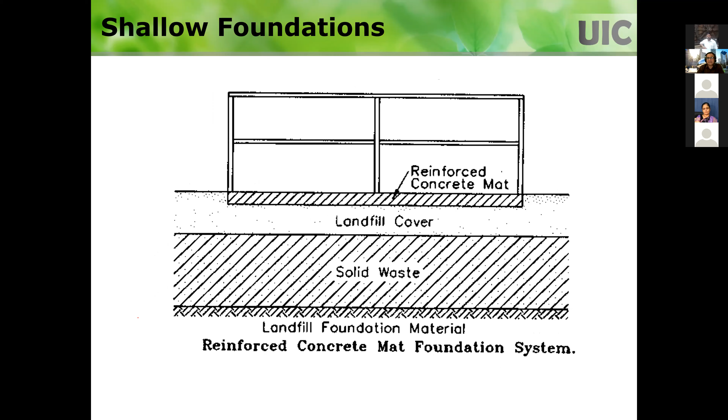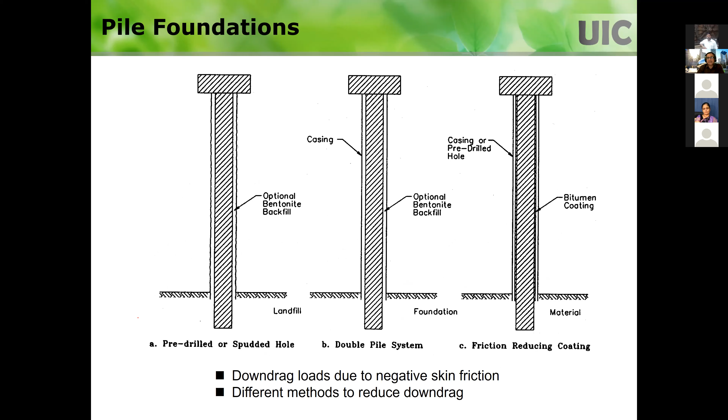And piles have been used extensively in some of the old landfills to support higher loads. But you need to take into account the negative skin friction, downdrag loads, and also figure out how to reduce the down drag, and any kind of environmental compatibility issues you have. You can look at that.

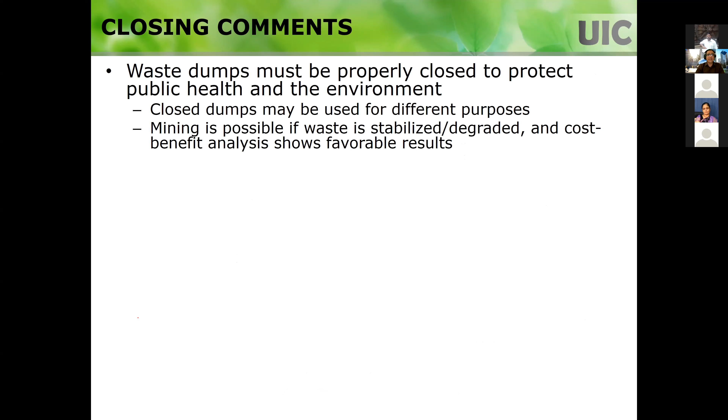So I've taken up time. Just some closing comments. I hope I've convinced you that waste dumps must be properly closed out. You cannot keep on putting more new waste on that, and these problems are going to persist for a long time. And the closed dumps may be used for different purposes. Mining is possible if waste is stabilized, and cost-benefit analysis shows it's favorable.

Newly generated waste should be managed as per sustainable integrated waste management strategies, and you need to have engineered landfills as part of that. Design of landfills is well established. We still do research on landfills to make them more efficient and inexpensive, but the standard design procedures are already there.

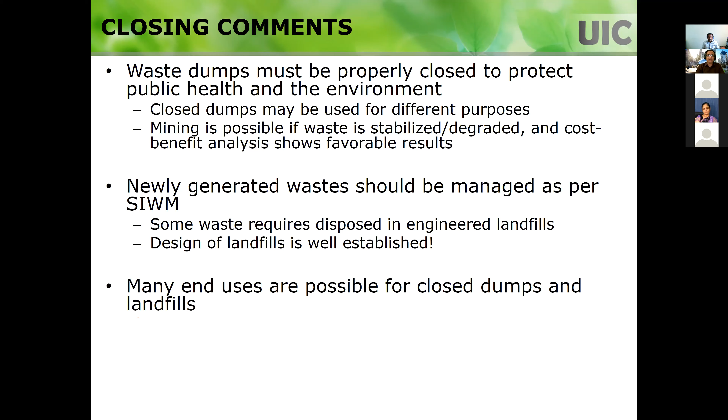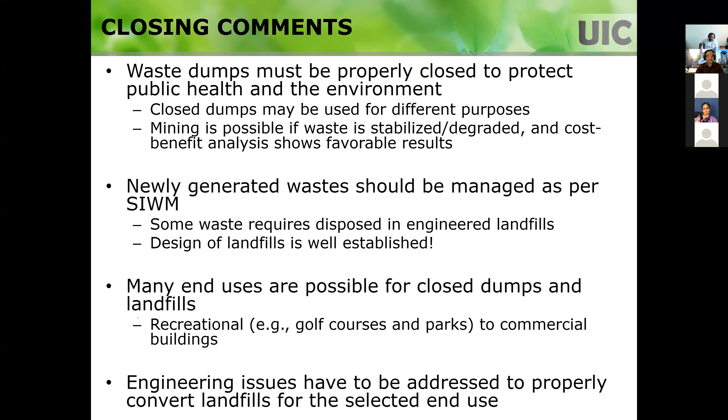There are many end uses that are possible. So that's the point of my presentation. These end uses pose a challenge, especially if you are trying to create commercial buildings on these sites. Some places want to build buildings because those are the primary locations, so even if it costs more, even if it requires constant maintenance, they want to do that. Those are the examples that I mentioned.

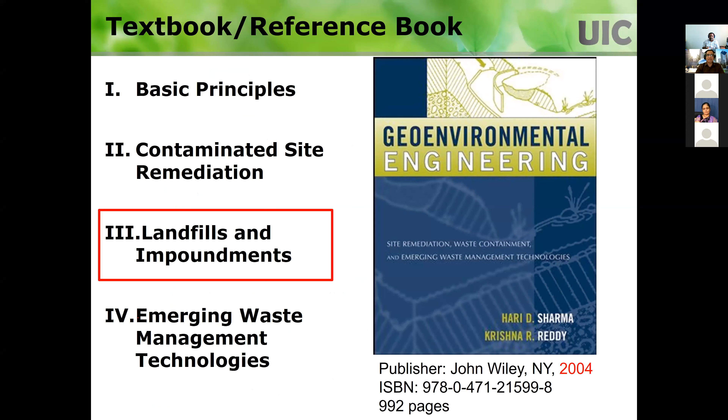In the end, if you are working on landfills or waste management issues, I highly recommend you take a glimpse of this book and these chapters. I cannot overemphasize the need for this. This book is written mainly to avoid confusion for first-time learners on how to do these things in a systematic way, each one explained systematically. You won't be regretting it if you get a chance to look at these things.